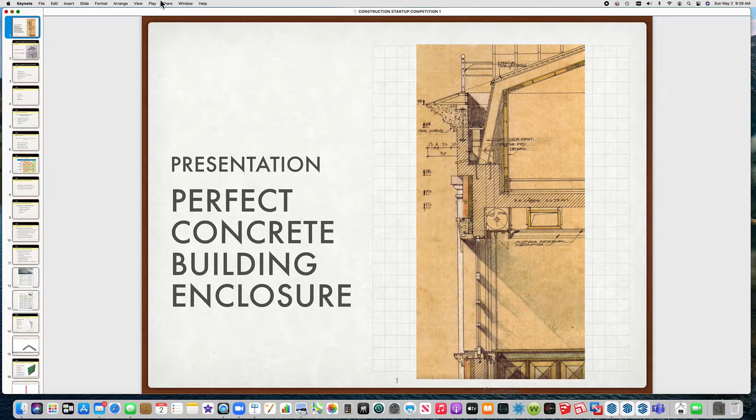I'm a registered structural engineer in the state of Ohio. I'm also an accredited professional with LEED, Building Design and Construction, and I have 45 years of construction management, design, inspection, and forensics experience in Central Ohio.

The point of today's presentation is to give you an idea of what my invention is.

It incorporates the longevity of concrete in the wall system. It is of extremely high quality due to the nature that it is totally visible all at one point.

There is much less field labor involved. It's a very energy efficient wall. It delivers very high indoor air quality due to its components.

The framework is manufactured off-site with modular components, which allow it to take advantage of manufacturing technology in quality improvement. And the framework is internal and negates the need for expensive forming systems. Therefore, it is less costly.

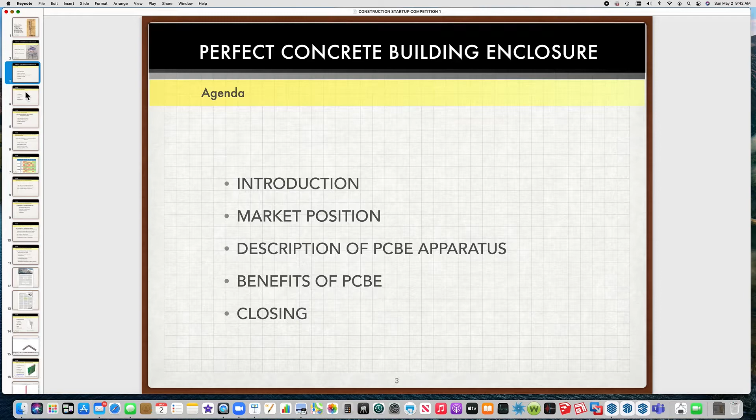The market position I envision are for universities, healthcare, hotels, and residential. And why is that? Well, these buildings require the following performance criteria: high indoor air quality, comfort to occupants, energy efficient, and longevity.

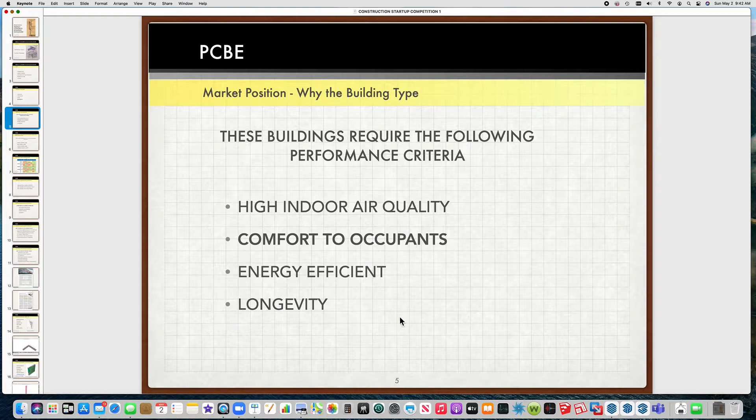The prioritized attributes of an effective building envelope: the highest priority is the water control layer. The second is the air control layer. Third, vapor control. And lastly, thermal control layer.

In other words, if your exterior building enclosure lets water in, it doesn't matter how good any of these other things are, it's going to be a complete failure.

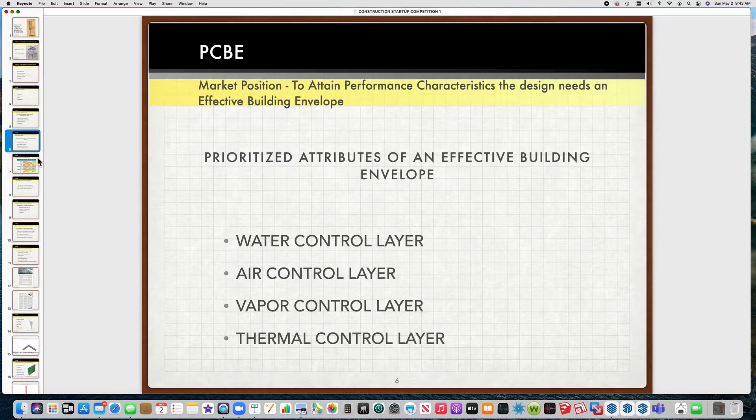So in taking these priorities, I've compared rationally the different building enclosure systems on the market.

So down along this column are the attributes, and the top row are the different current building enclosure types: cavity wall masonry, EIFS, metal panels, thin veneer, precast, cast in place sandwich wall, and the perfect concrete building enclosure.

Now, I rated these different systems. Like a cavity wall masonry is the barrier for water control uninterrupted, and it isn't when you build a masonry wall. So I gave that a negative, or red. And if it is neutral, I give it a yellow and a number score of 0.

And if it's good in that area, like a masonry cavity wall does dry to the inside, I give it a green or a 1.

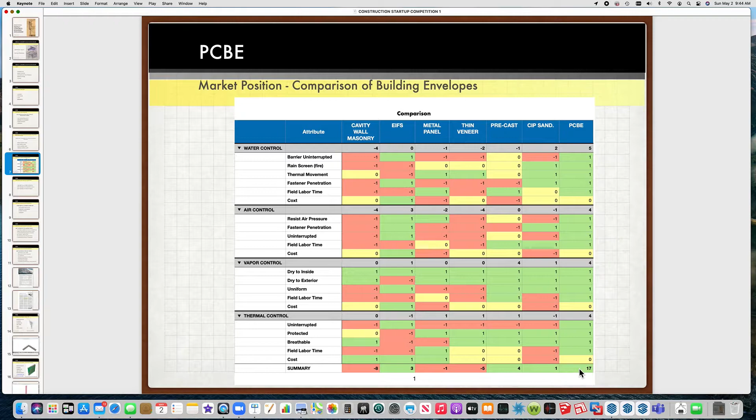So I rate all these systems and I sum up the numbers, and the two high ones are precast and cast in place sandwich wall construction, and my system, the perfect concrete building enclosure, just knocks it out of the park with a 17.

Basically, the perfect concrete building enclosure has the best of precast systems and cast in place sandwich wall systems. It meets all their desired attributes, and those attributes, which would be high indoor air quality, comfort to occupants, energy efficient, and longevity.

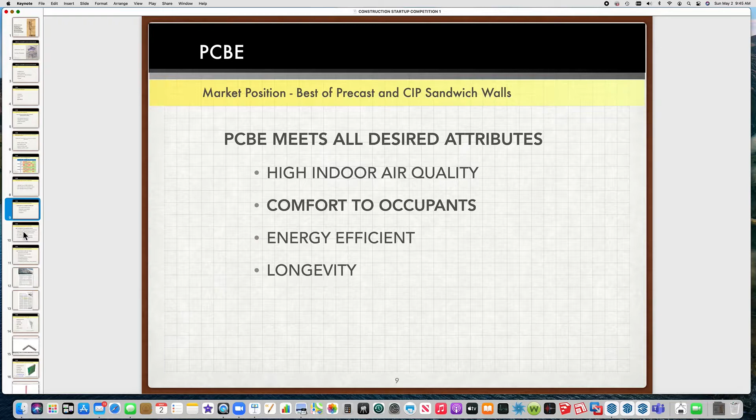The best features of cast in place sandwich walls: the thermal barrier is encased in concrete and protects the structural wythe of the wall. The vapor barrier is encased in concrete. No fitment issues in the field since it's cast in place.

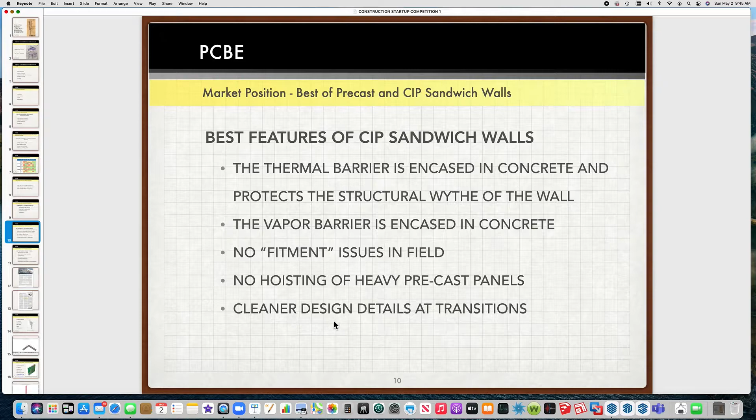No hoisting of heavy precast panels. And it's a cleaner design details at various transitions throughout the wall.

So how about precast panels? Well, it also has the best attributes of precast: reduction in field labor, reduction in project duration, quality control is greatly simplified, precise reinforcement, can also use composite reinforcement, continuous insulation,

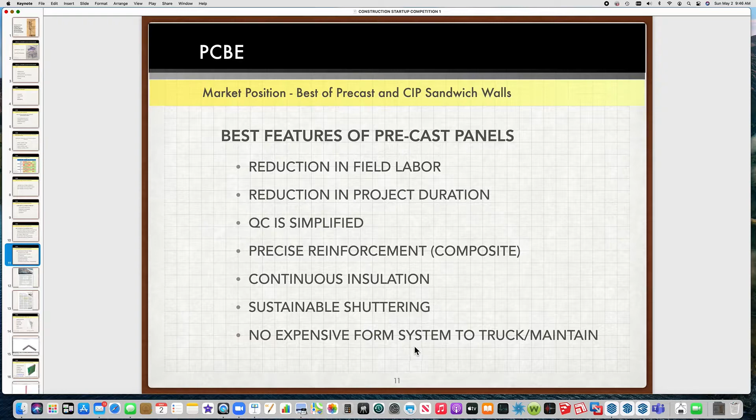sustainable shuttering, and no expensive form system to truck and maintain.

And building enclosure is a modular system. The framework is made up of several standard components that are made in a factory and assembled in a factory per a set of shop drawings that are approved by the contractor and the architect.

Modular fabrication is ultimately a manufacturing process that the construction crews can finally tap into to increase productivity and quality and reduce the amount of field skilled labor that is required. So quality, price, and time are all improved by using modular.

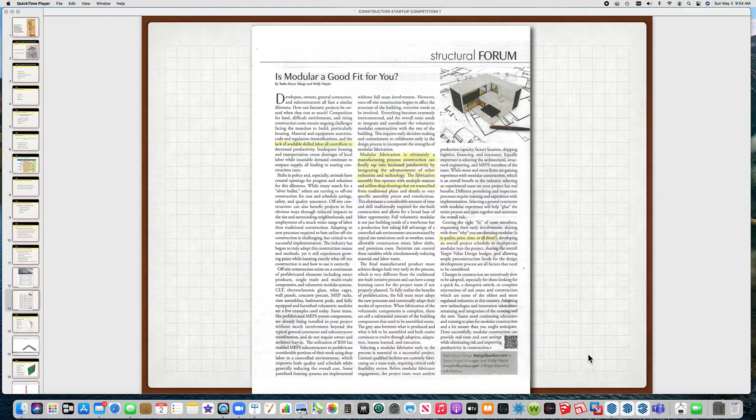So here we are, starting with a footer. It's time to show you the apparatus in use. I first would like to start with the end in mind, a sample project of two straight walls at a particular length each and an outside corner, just for simplicity.

These walls are going to be setting on the form footer that you see that has vertical rebar dowels sticking up. Now this very well could be the 3rd or 4th floor of a building that we start with, but for simplicity's sake, we're going to have two straight walls, particular length and height, and an outside corner.

Now, the shop drawings have all been approved. The panels have been manufactured and shipped to the job site. Now it's time to start building this little project.

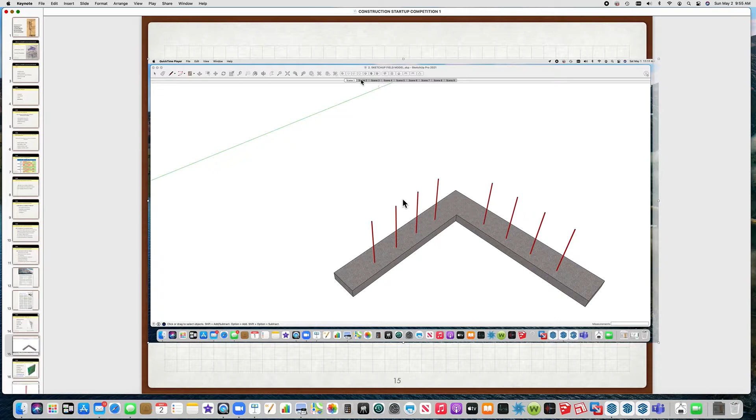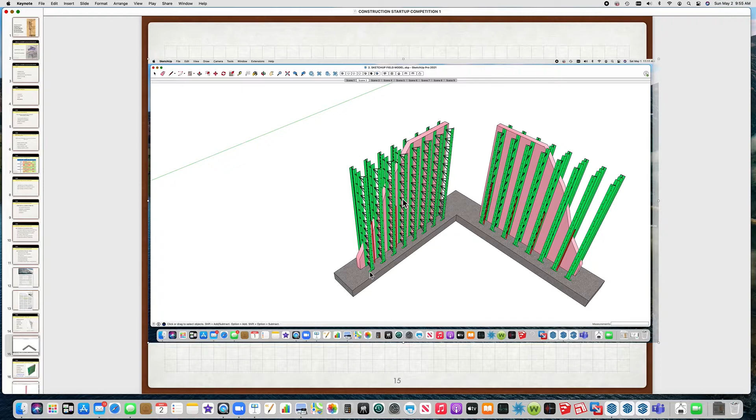So first thing the crews will do is set the two panels, the straight wall panels, that are a project-specific height and length, and they set them in an exact location on the footer, and they get bolted down through these little feet to the footer.

The next step is to insert the corner module. In this case, it's an outside corner, and there's two friction fit H members that get attached to the rigid insulation panels, or rigid insulation partitions of the panels. And that's how we get a seal from one panel to the other.

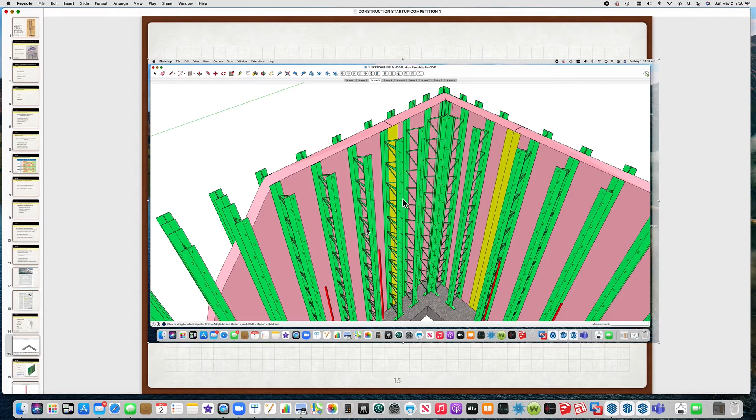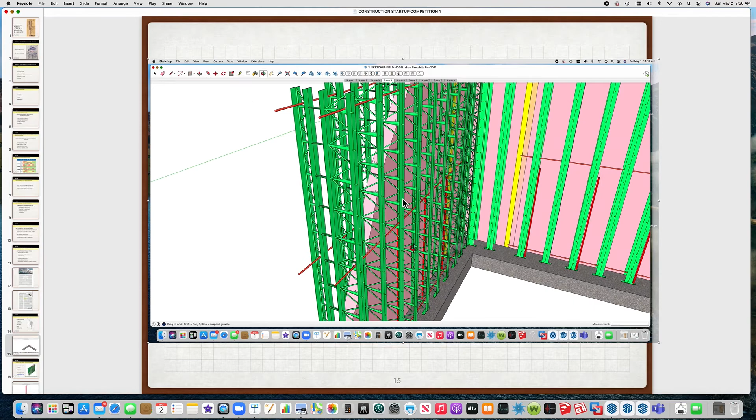Okay, the next step for the field is to insert the horizontal bars as called out on the engineer of record's drawings, both in the exterior partition and interior partition. You can see that better here. And remember, we have these rebar locators that locate the bars, the exact location from the outside face of the concrete.

Now, the next step for the field crews is to install the shuttering. Well, one more step before that. Let's go back a minute, because this is one of the important things. Now, all the bars are installed, the horizontal, the vertical. If there is any electrical or mechanical embedded items, everything is done, ready to go.

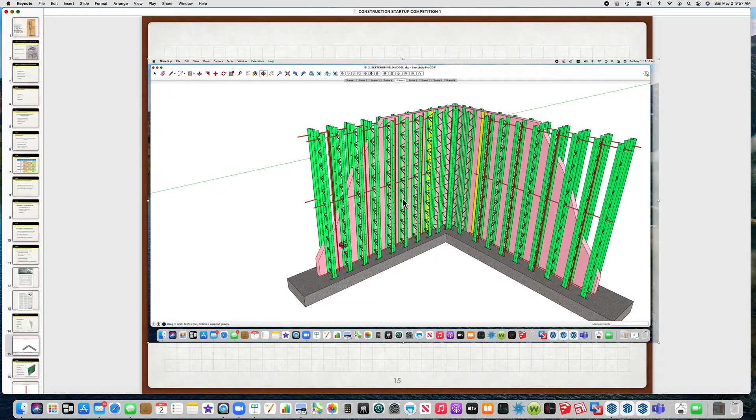At this point, an inspector or a quality control officer from the contractor's crew can visually inspect every component, the seals, the fitment, the rebar spacing, everything, where the electrical goes inside and outside for this wall prior to concrete pouring. This is one of the beauties of this system. Quality control is made very, very simple.

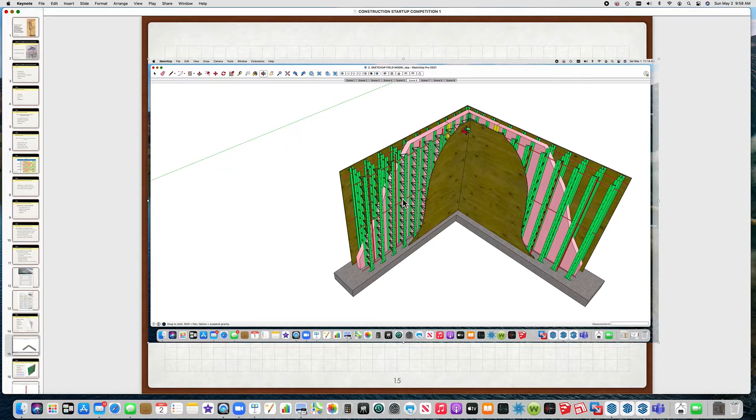So now, once the quality control officer or inspector has visually inspected everything, the shuttering can be installed. In this case, it's plywood, 3/4 inch plywood, and it gets fastened to these struts in these vertical flanges. These flanges are 3 inches wide, and as you can see, there's standoffs to keep the shuttering 3/4 of an inch off this face, so that concrete completely encapsulates the trusses.

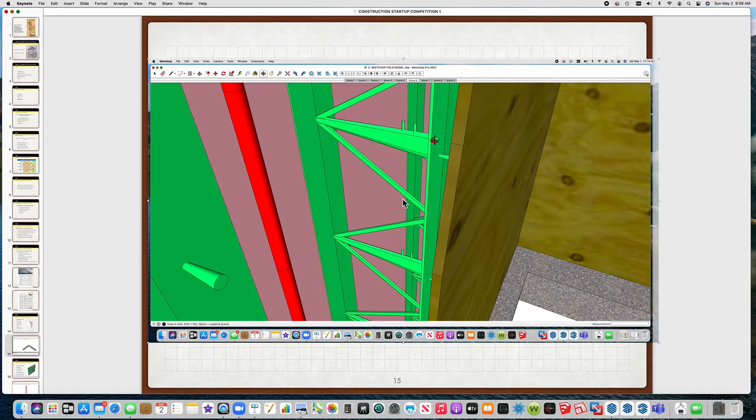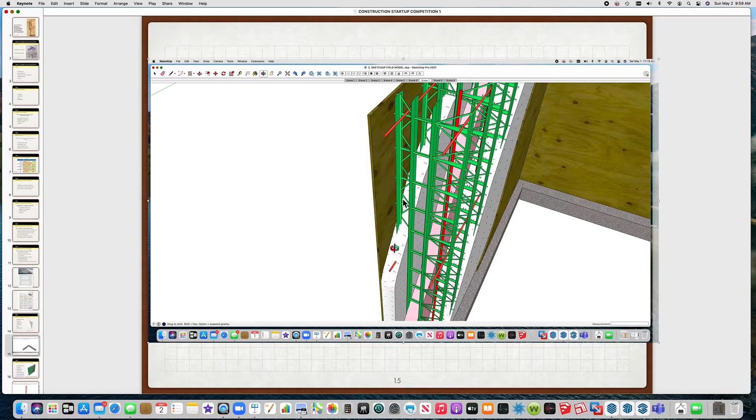So the next step in the process is to pour the concrete. Concrete is poured, and this is a cutaway, of course, but you can see there's two separate individual partitions of concrete. In this case, the project documents called for a 4-inch width of concrete on the exterior and an 8-inch on the interior.

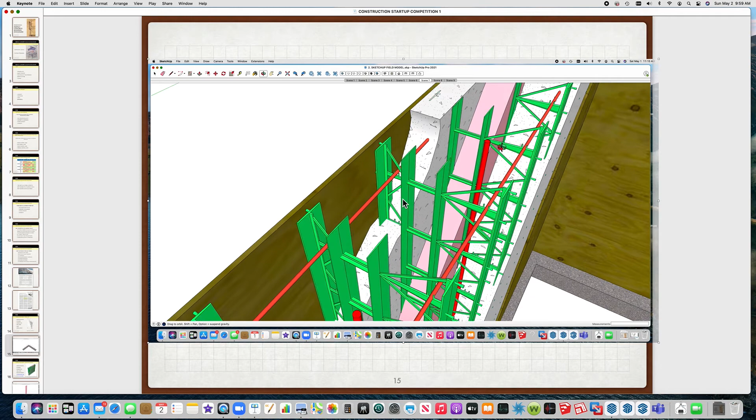These are connected through these shear connectors. These shear connectors go all the way through, and you can see how it works right here. But they're completely embedded, and they're tapered to withstand the tensile loads and to make these two partitions act together as one concrete wall with less concrete.

Shuttering is removed, and you can see you have a nice clean concrete face on both the interior and exterior. And the other nice thing about this is that you can visually inspect how well the consolidation job the crews have done, so there's never any worry that it stays completely covered. And also on the exterior. So that is it.

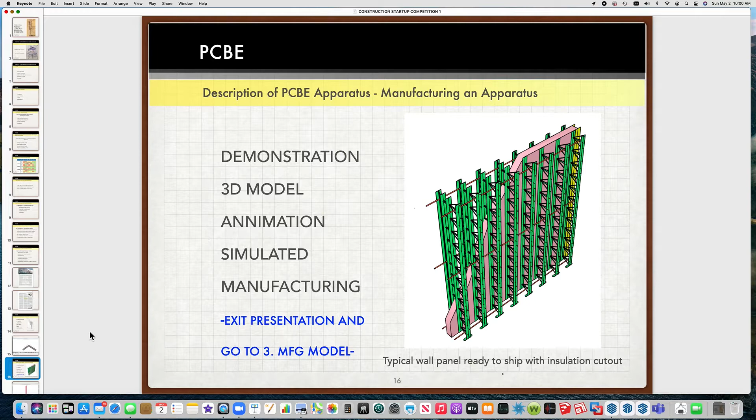And now we'll do a demonstration of the model being fabricated. This 3D model that I showed you was after all the manufacturing was done and the panels were shipped to the job site, how they are used. Now I'm going to show you how the panels get assembled in the factory.

Now to make a straight panel, there's three components. There's the rigid insulation partition. There is the vertical truss member, which is the heart of the system.

To connect the panels together out in the field, there is a plastic H-shaped connector device, this yellow thing right here. So let's see how one of these panels gets assembled.

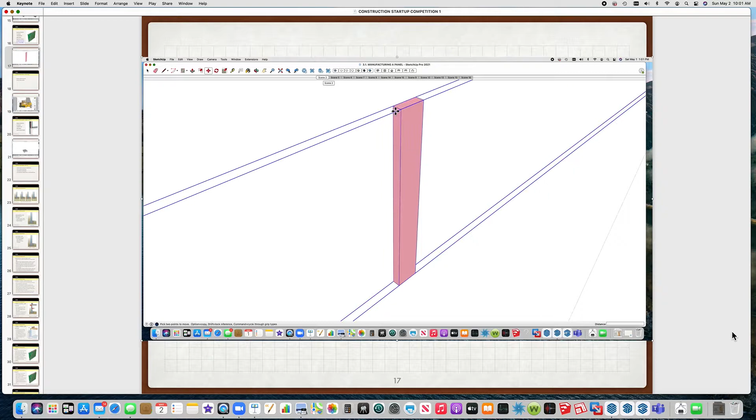First, it starts per project by cutting the piece to the correct height, and the spacing for this particular panel is 12 inches. So this panel is 12 inches in this direction, and the height is called out on the approved shop drawings, which I'm going to show you an example of later in the presentation.

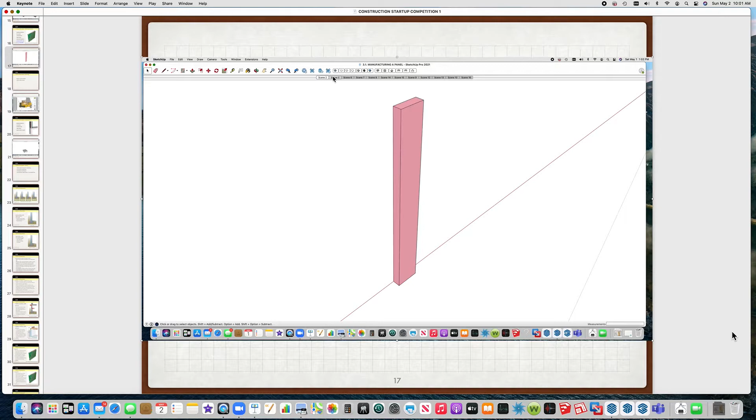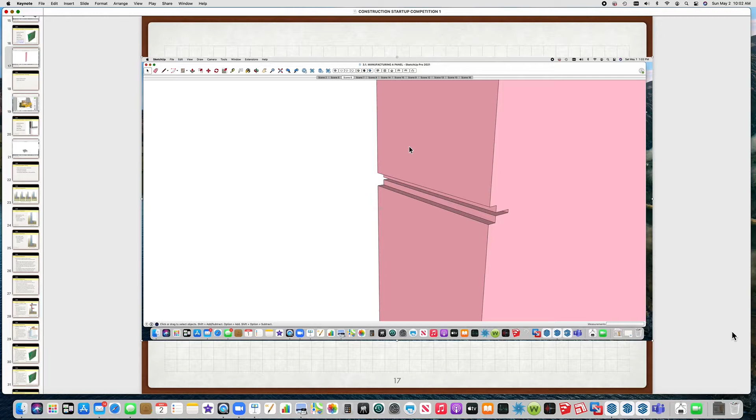The next step is to take this rigid insulation partition and cut grooves into it. These grooves are precisely cut, and through manufacturing a system can be developed, either a hot wire or a laser or some other method, whatever would be most economical and quick to do. It's also done on both sides, as you can see.

So the next step is to cut the pre-made vertical trusses to height, so that this height matches the approved shop drawing.

As you will see, these trusses have shear connectors that go all the way through the rigid insulation, and provide two things: support of these flanges during the short duration liquid state of concrete, and the long-term shear connection capability to allow the two concrete partitions to act together in composite action.

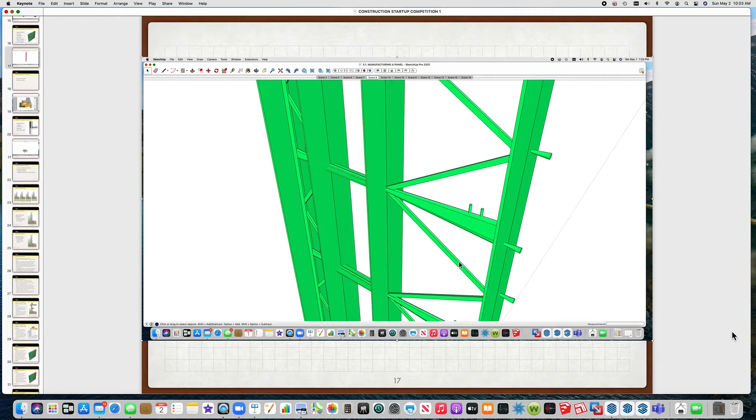Also, these trusses have feet on the bottom, which have holes for attaching to floors, or in the case we showed previously, a footer.

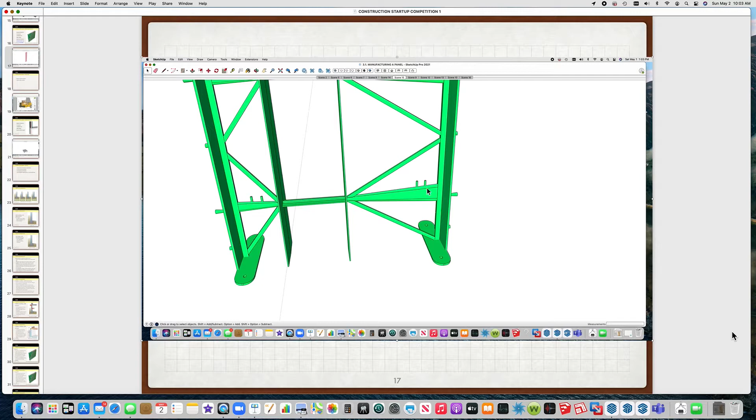As you can see, it is symmetrical around the center line, so it can be easily manufactured with an injection molding system.

The next step is to spray the rigid foam pieces that we grooved with an adhesive and attach it to the vertical truss. And as you can see, it's a real tight fit.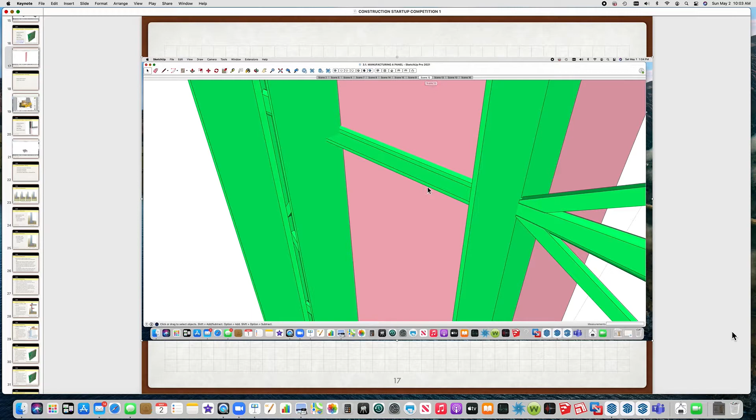The next step is to bring in another rigid insulation partition and spray adhesive the same way. And this process is completed until the length of this panel matches the length on the shop drawing.

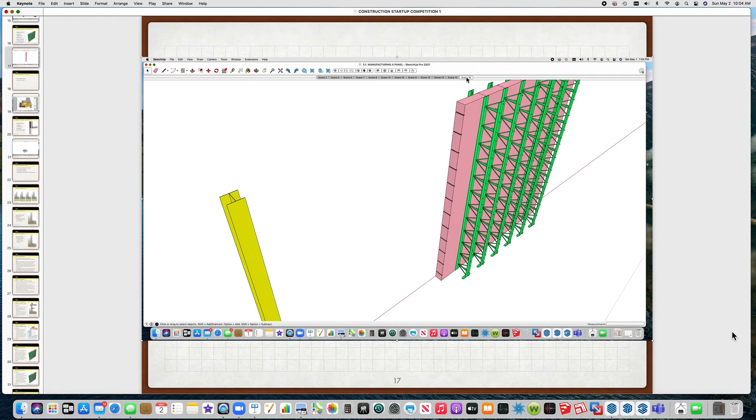Once it is done, the factory will mark on the top what mark number it is, so it matches the shop drawing. Now, connectors, these are slip-on connectors, will be attached in the field.

They are friction fit, and quite easily attached by just sliding them right onto the rigid insulation, as you can see, just like that. And then the next panel is slid right into it. So that's how that works.

And that is the system during manufacturing. The beauty of this is that the separate components, the 5 separate components, can be manufactured ahead of time and cut to the appropriate length for the assembly process, taking advantage of manufacturing technology to continuously improve the quality, the fit, the cost, and the duration, and also look at other materials in the future.

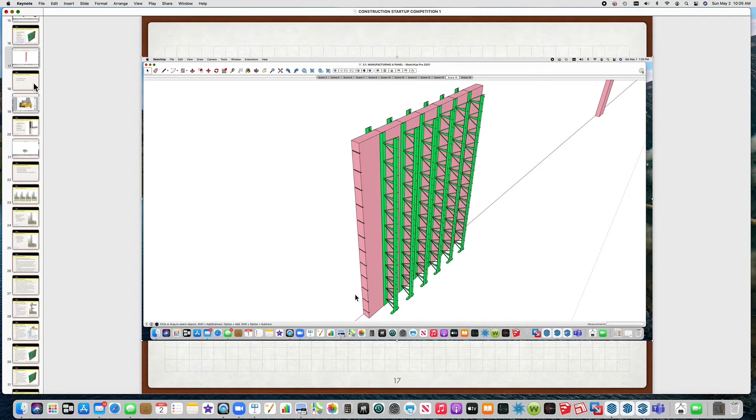Okay, the next step is to show you the shop drawing phase.

The last two 3D CAD models were representations of how the field assembles the panels and how the manufacturing plant would assemble the various components to make the panels. Well, what happens before that? Well, there's a typical shop drawing process.

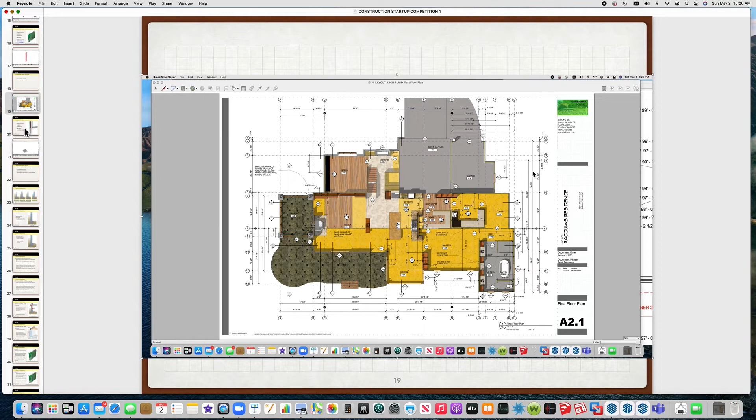What you see here is an architectural drawing that gets submitted to the client, and there's also a foundation plan, which looks like this. The foundation plan has all the lengths, dimensions, top of wall marks, and any penetrations that are listed.

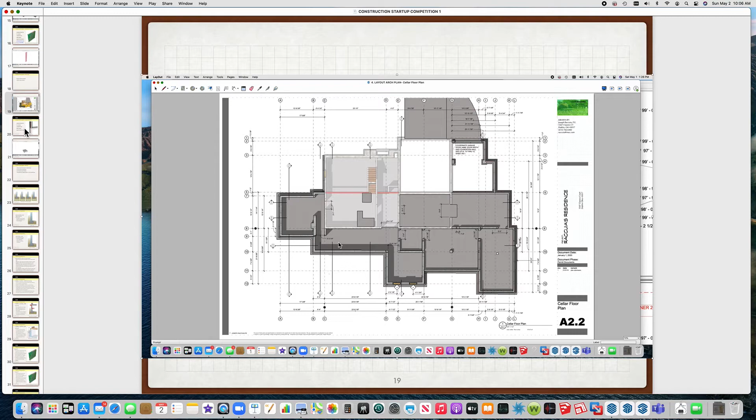We're going to look at this wall right here and show you what a shop drawing layout plan with all the different pieces would look like. So here's that wall right here.

It's made up of one outside corner and one inside corner, both 2 foot by 2 foot, which is our standard module for corners. The wall panel is exactly 24 foot, 3/4 inch long, and the top of wall is 8 foot and 1/8 of an inch high.

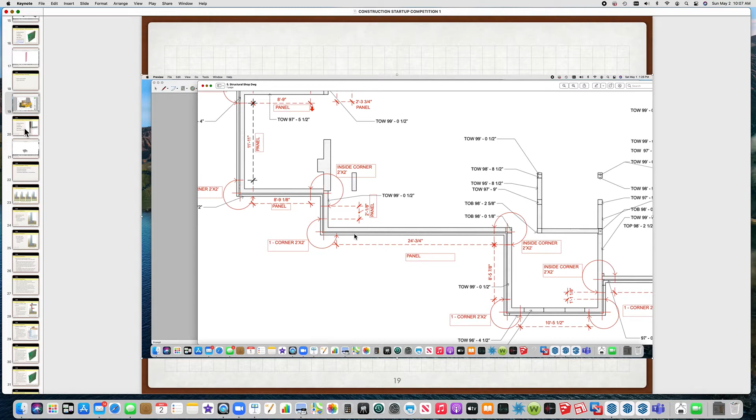So this would be submitted to the contractors and to the architect for approval. Once approved, then the panels can go into manufacturing. And it's the same way for all the panels on the exterior walls.

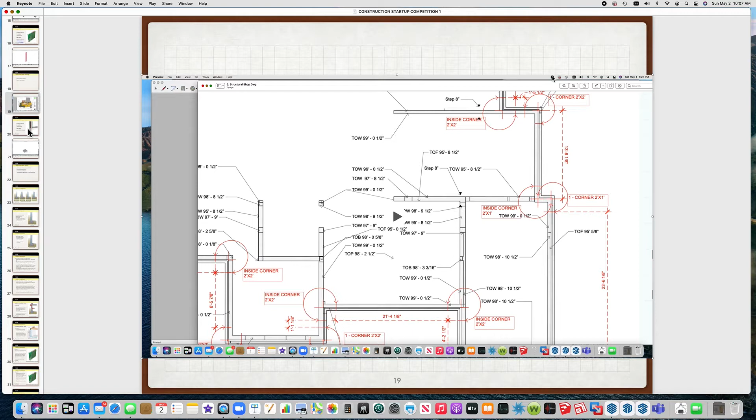Okay, the next video is going to detail how we do multi-story construction.

This system is also quite easily adapted to multi-story construction, and I'm going to run through an example very quickly on that. Starting with the footer, the first step is, as we saw before, installing the wall panels, and the other steps I'm not going to show you.

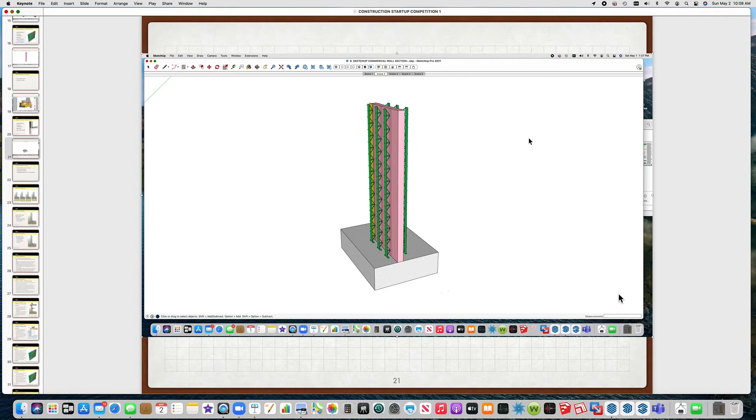Rebar, embeds, putting on the shuttering, pouring the walls, and then taking the shuttering off. So the result is a concrete wall on the lower floor.

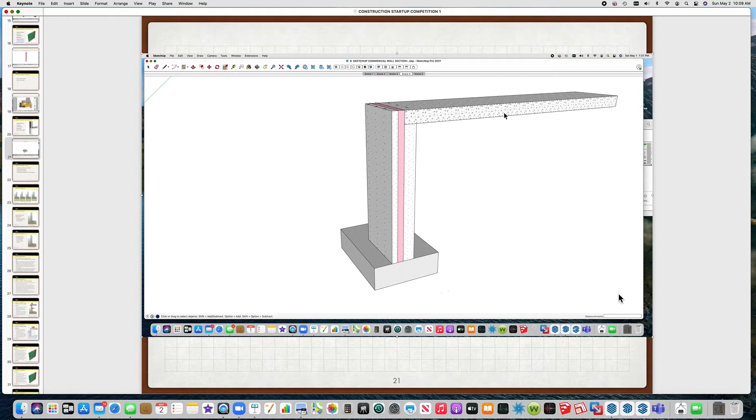The next step would be to either pour a concrete floor, or a steel with metal deck floor, or a precast concrete floor. And then, as you can see, the process starts all over again. And that's how multi-story construction can be done.

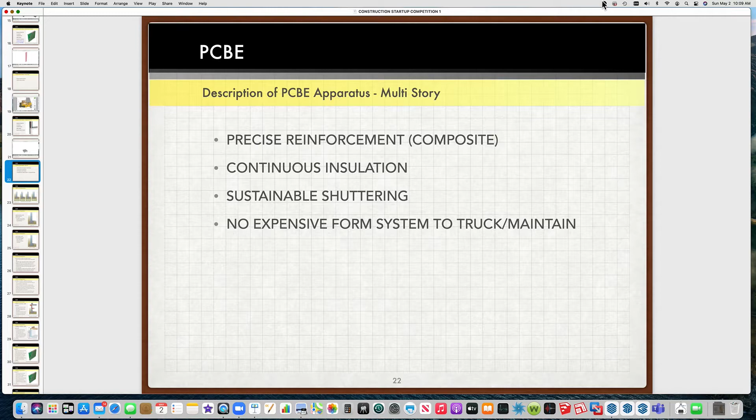The perfect concrete wall system, from shop drawings through manufacturing through field installation.

I'm going to spend more time describing the system in detail. I mentioned before that there are rebar locators that allow for precise reinforcement location. In addition, I see in the future that composite reinforcing steel could be utilized in this system quite easily and installed in the factory due to its lightweight, then shipped to the job site already installed.

Continuous insulation—I can't stress this enough—that continuous insulation partition in the center of the wall serves three purposes: it's an air barrier, a vapor barrier, and a thermal barrier. The material I talked about earlier was expanded polystyrene, which has an R value of about 5. There are other materials—phenolic rigid board has an R value of 8. The beauty of the manufacturing technology system is that materials can be analyzed and determined in the future as to which way they're going to go, if they go with different materials. So manufacturing, unlike construction, does have R&D to improve the product.

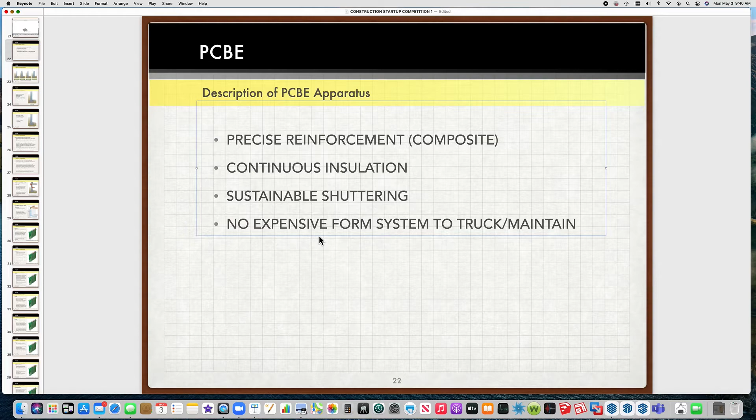Having the insulation partition in the center of the wall results in the perfect concrete wall system. I'm going to go through a few of the reasons why. With a wall system where the insulation is on the inside, whether above grade or below grade, when outside temperatures are colder than inside temperatures, if there are any leaks or cracks at all in this internal wall, the warm vapor transmits through and hits the cold surface of the concrete, condenses, and causes other problems: leakage, mold, decay, rot, bad odors.

On the next system, where the insulation is on the external face of the wall, whether above grade or below grade, the layer of insulation needs to be protected during the construction process and also during the life of the building. So there needs to be a protection membrane put out to protect it. Now, in most southern states, this practice is frowned upon due to termites—termites love to get into insulation and call it home, using it as a way to get up to the roof of the building and eat up the roof system. So that's a downside for that system. Putting insulation on both the inside and outside is even worse, because all the problems with having it on the external side and internal side are still present.

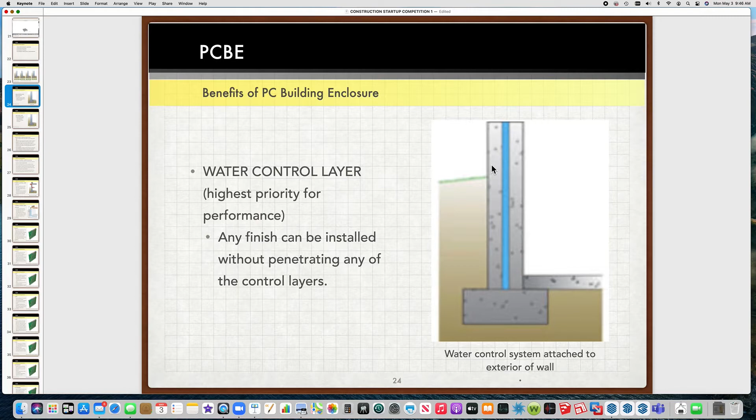I mentioned that the water control layer of a wall is the highest priority for performance. Having a solid concrete partition on the exterior of the wall means any finish can be installed without penetrating any of the control layers. The next highest priority is the air control layer, and it is continuous and verifiable. It is this continuous insulation partition in the center of the wall that is connected with H-shaped friction-fit connectors at all the joints. I say it's verifiable because before any of the walls are installed, before any shuttering is in place, it can be verified by a third-party inspector to confirm that it is continuous.

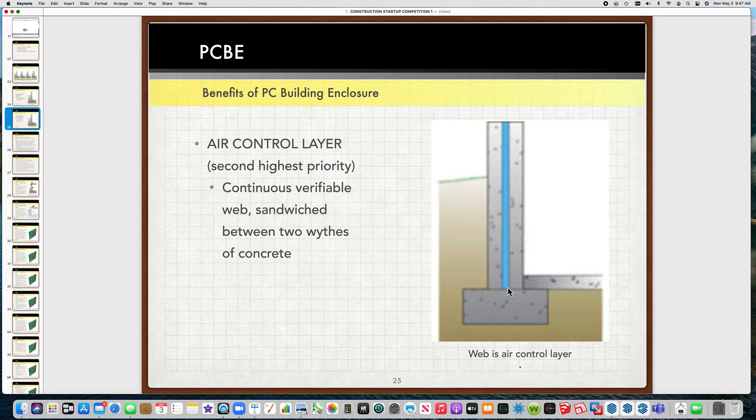The third highest priority is the vapor control layer. Again, it's that insulation partition which allows drying to the inside and drying to the outside from the center of the wall. Differential vapor pressure from a typical building, from inside to outside, is usually a factor of 2 times. The entire cross-section of the perfect concrete wall system is a vapor control system, with the benefit of concrete on both sides of the vapor barrier web. The concrete retards the flow of vapor by 3.2 perms per square foot per inch of concrete. There's no condensation on the interior face of the wall due to high vapor control performance—therefore no mold, no odor, no decay, and no corrosion, resulting in a comfortable indoor environment.

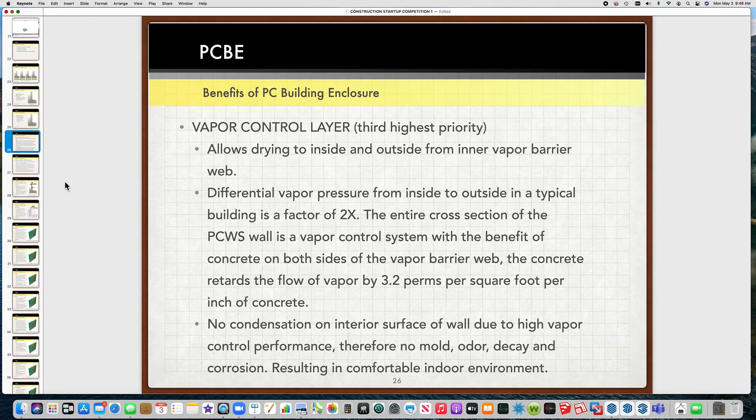The thermal control layer, the fourth and last priority. Insulation is not exposed for long periods of time during construction, so there's no physical damage or sunlight exposure. Insulation is not exposed after construction to physical damage because it's protected with 2 layers of concrete.

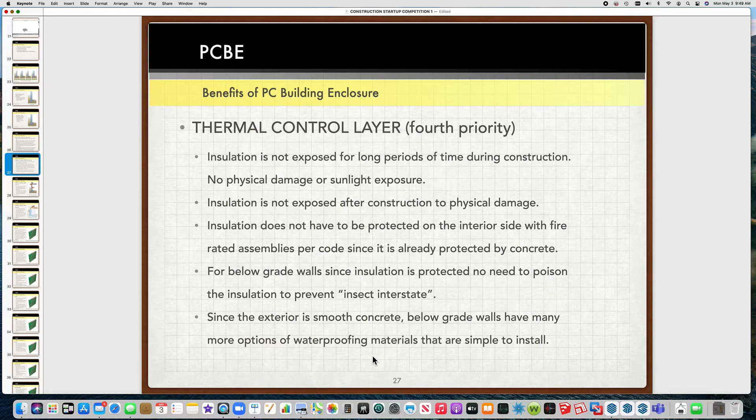For systems where you have below-grade walls, since the insulation is protected, there's no need to poison the insulation to prevent the so-called insect interstate. Since the exterior is smooth concrete, below-grade walls have many more options for waterproofing materials that are simple to install.

A typical 4 inches of extruded polystyrene at an R value of 5 will produce an R20, but the thermal mass of the concrete on the inside and the outside greatly increases it, with an effective R value of R42. Basically, the thermal mass slows down the heat transfer through the wall. It's very durable for the long term because the insulation, air barrier, and vapor control barriers are sealed in concrete and protected.

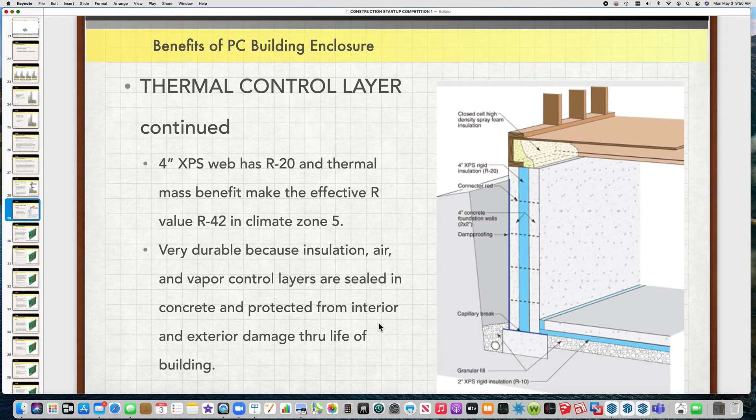Quality. Since these panels are manufactured, the web insulation, the shear connectors, the composite horizontal rebar are precisely placed and eliminate any field errors. Panel connectors ensure air tightness, these yellow H-shaped friction fit connectors. Since all panels as well as all vertical reinforcing are placed before the shuttering goes up, the entire system can be visually and third-party inspected all at once.

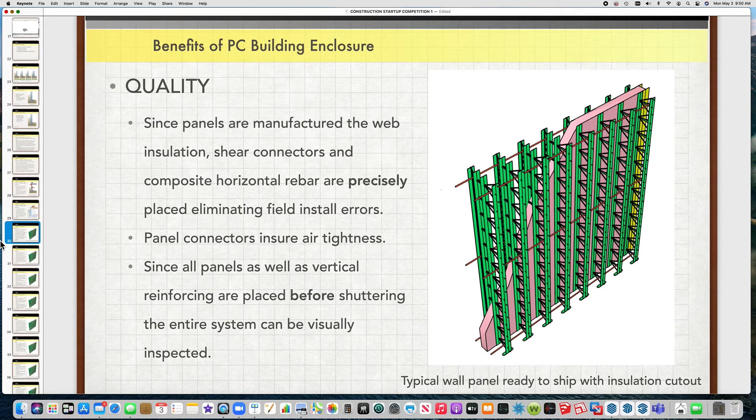Accurately placed reinforcement steel prevents cracking, and continuous impervious web results in double protection against air leaks and water leaks. After shuttering is removed, visual inspection of the interior and exterior surfaces of the wall is performed to ensure a quality wall.

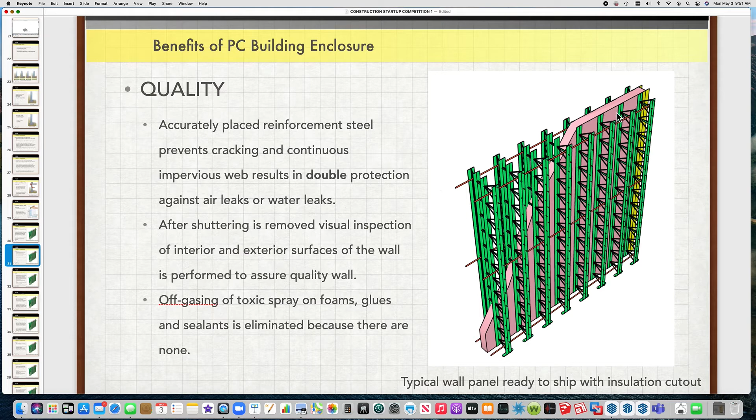Off-gassing of toxic spray foams, glues, sealants is eliminated because there are none. Now, the jury is still out on expanded polystyrene, how much off-gassing it has, but because in this system it's totally encased in concrete, there is no chance of that off-gassing to the inside of the wall, as there would be if this insulation was placed on the inside.

Engineering, submittal, and manufacturing is minimal since the product has a small number of standardized components. These struts, these web members, these connectors. Shipping costs are minor since panels are lightweight with composite horizontal rebar and no heavy concrete to ship around. No equipment required to unload and install.

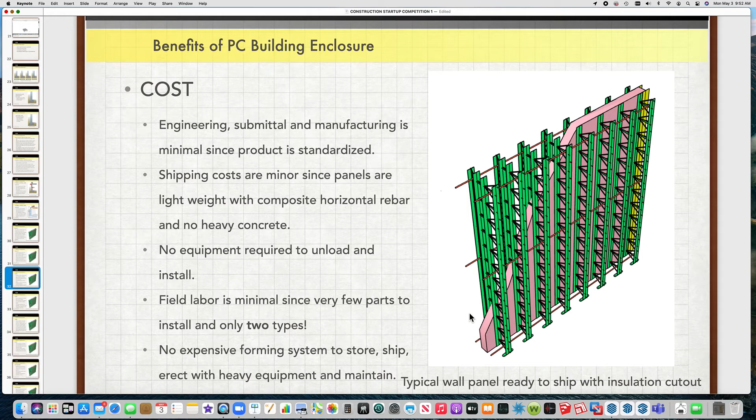Field labor is minimal since there are very few parts to install and only 2 types of panels, the straight wall panel and the corner panel, all with control marks along the top showing the field crews where they go. No expensive forming system to store, ship, erect with heavy equipment and maintain.

Plywood shuttering can be used for other parts of the building. Plywood shuttering can be installed by any carpenter. Similar to installing drywall, it's very easy. It gets installed with a self-tapping screw, number 8 screw with a button head top.

The composite struts and ties are designed for a 4 foot per hour pour rate, as well as full shear resistance when the wall is subjected to lateral loads. External wall system can be easily attached to the exterior concrete withe with no additional support steel. Since there is no exposed insulation on exterior or interior, no additional fire-rated materials need to be installed.

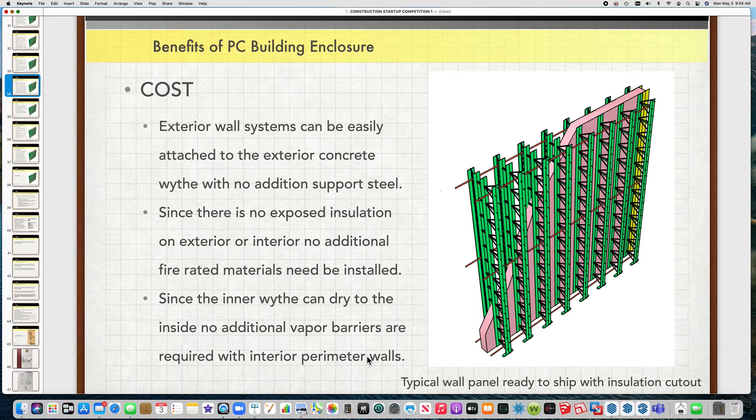Since the inner withe, that's the inner withe of concrete, the inside face, can dry to the inside, no additional vapor barriers are required with the expensive flashing and tapes and sealants and adhesives. Below grade spaces, if this system is used for below grade, can actually be used as comfortable living and workspaces, reducing the need to increase the building footprint above grade.

With the high cost of residential houses today, if you can use the basement as livable space, then that's a big benefit. The first cost of mechanical systems providing heating, cooling, humidity, air quality control are minimized, since this system solves all the problems of air leakage, vapor control, and thermal control in the exterior wall.

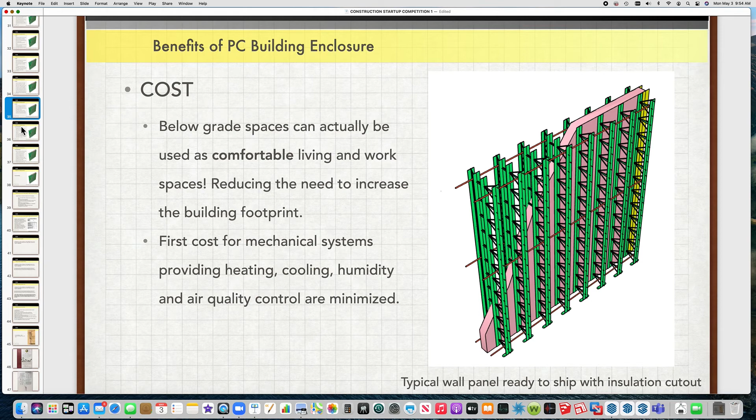Building envelope commissioning, which I think is going to be prevalent in the future in the United States, where the performance can now be predicted due to the ease of visual inspection all at once, right before they put the shuttering on. Minimal mechanical systems result in lower energy use. Since panels are manufactured to a project, there is little or no waste.

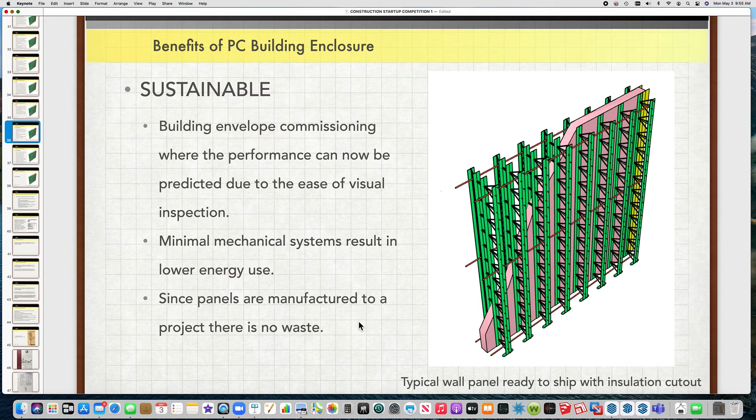Reuse of shuttering on the project reduces trucking, equipment for erection, metal forms, and material use, which boils down to less fuel being consumed. Therefore, a smaller carbon footprint. So this is very sustainable. The concrete is durable. In some buildings, it's 2,000 years old.

I know concrete is out for review right now as to whether or not it reduces the carbon footprint. Well, if you compare this to precast, the precast panels have to be trucked a long distance, which consumes a lot of fuel. Most concrete plants are very close to the job sites, so you reduce that trucking. Concrete itself, the cement, consumes a lot of energy in the production of cement.

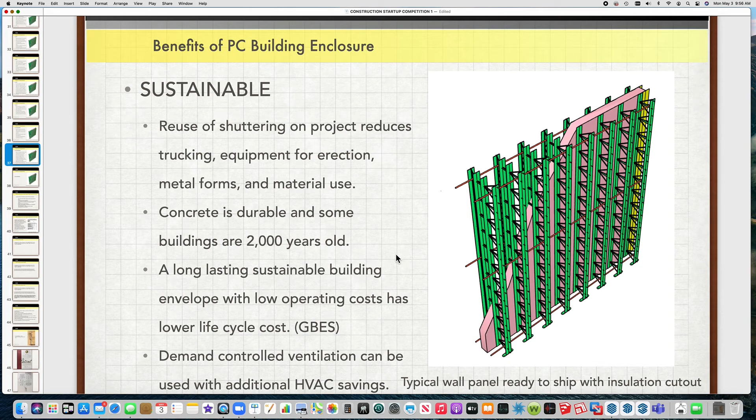However, there are technologies today that are being developed using crushed and ground up fly ash to capture some of the carbon to make the concrete closer to being carbon neutral. So keep that in mind, that concrete is becoming a better material to use for sustainable buildings.

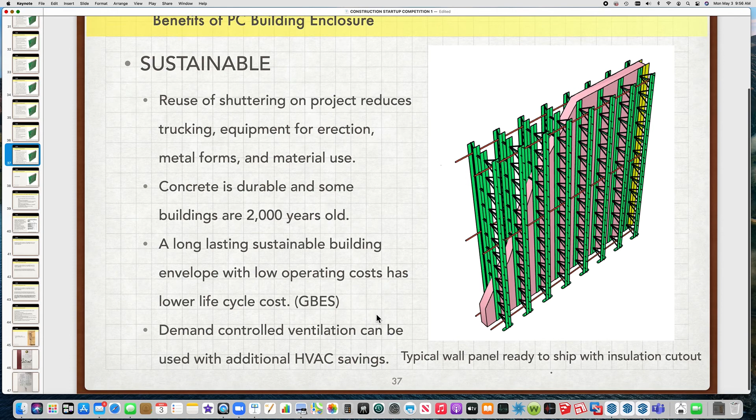It's a long-lasting envelope with low operating costs, and it has a much lower life cycle cost, according to the GBES. Demand-controlled ventilation can be used with additional HVAC savings, since the buildings are more airtight and vapor controlled. This system is engineered. I have engineered it, and I have all the calculations as backup if the right company wants to develop it with me.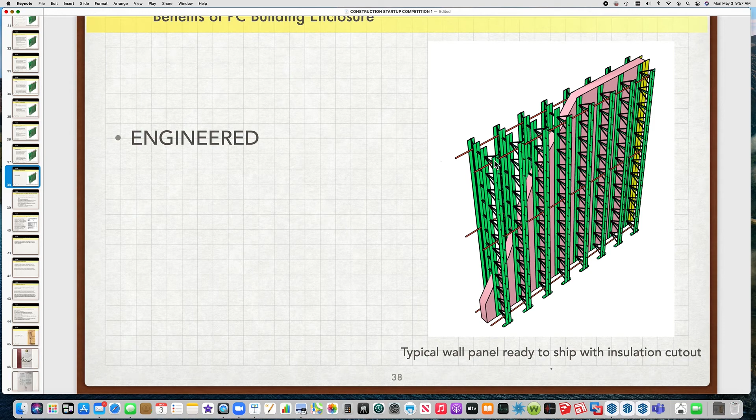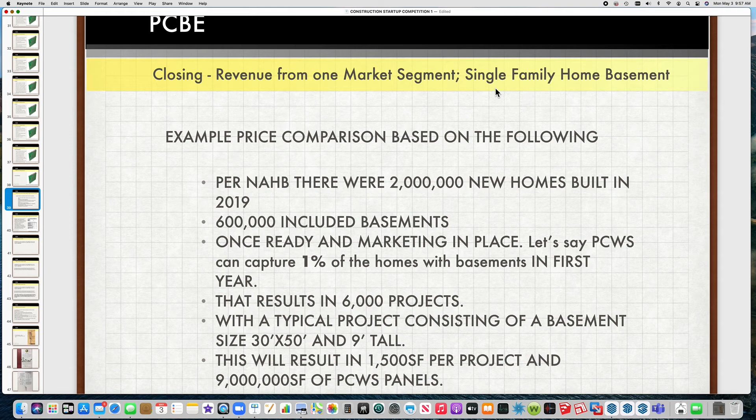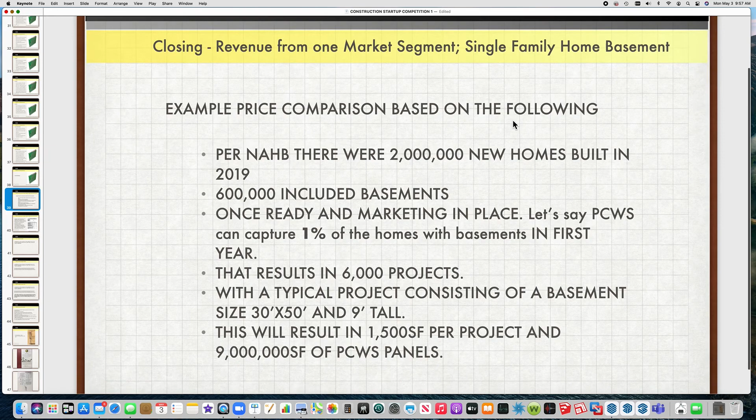Okay, now let's talk about price. The easiest access to information that I found in the 4 market segments was single-family homes. So I'm going to run through this example based on just the single-family homes, not the healthcare, university, or hotels. According to the National Association of Home Builders, there were 2 million new homes built in 2019. 600,000 of those included basements.

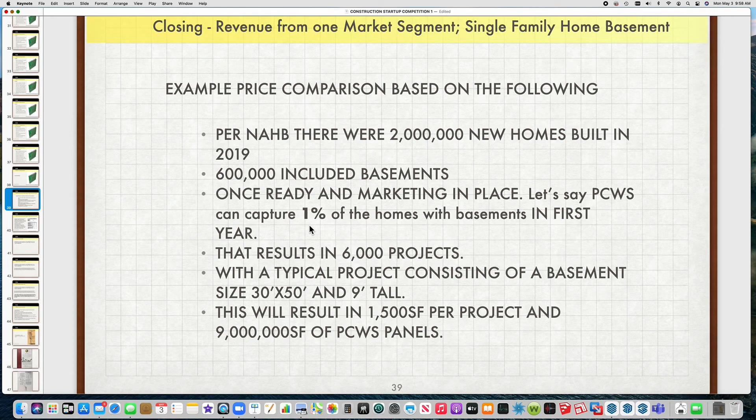And let's say we start out marketing the system for basements, and we capture 1% of those homes in the first year. That results in 6,000 projects, with a typical basement being 30 by 50, 9 foot tall. That yields 1,500 square feet of panels per project and 9 million square feet total panels. So using the 9 million square feet of panels, that would result in a market share of close to 85 million, only 1% of the market share. That is pretty incredible. So I think anyone who wants to manufacture has to market up or get ready for a huge influx of demand.

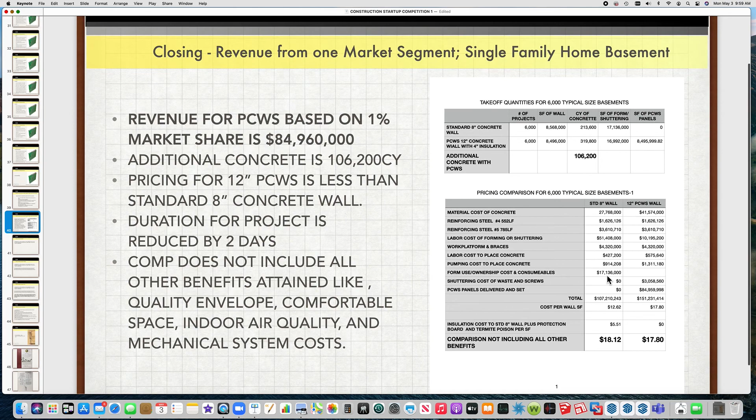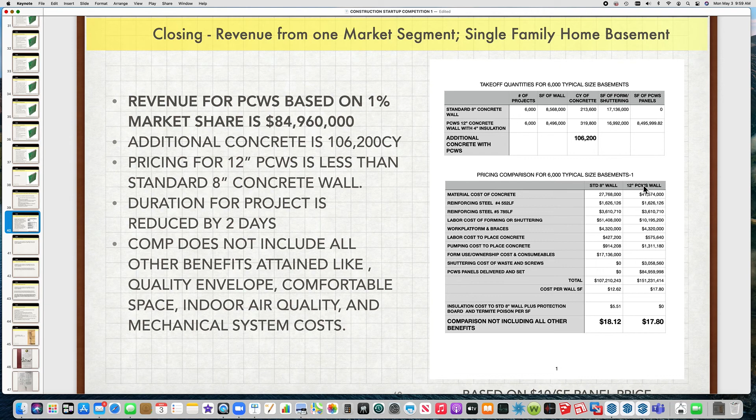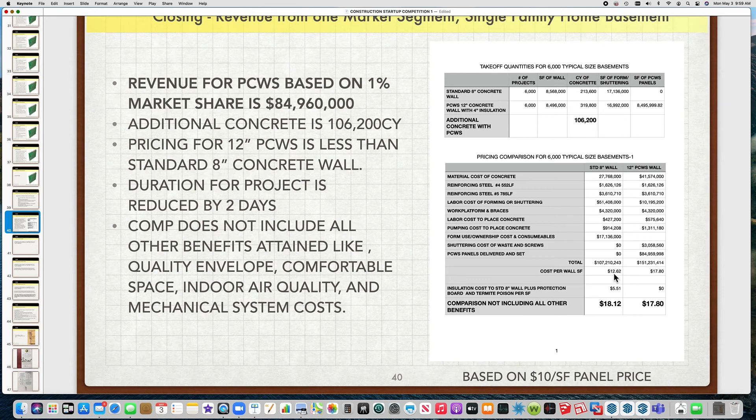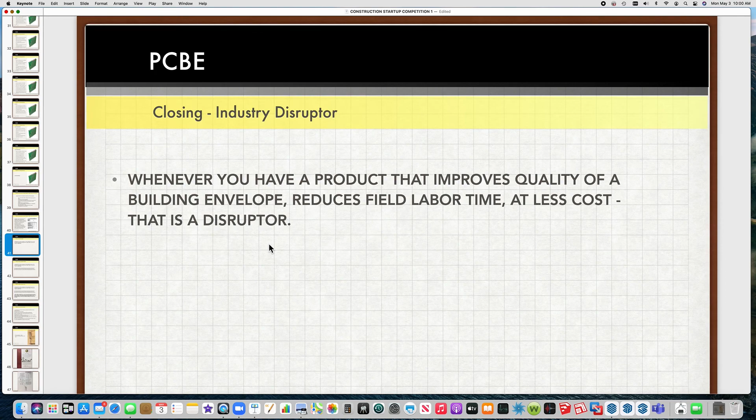I also did a cost comparison for a standard 8-inch wall with exterior insulation. So the 8-inch standard wall with exterior insulation versus the perfect concrete wall system. With the panel price of $10 per square foot, which I believe can be manufactured for much less than that, it shows that the panel system, or the perfect concrete wall system, is less expensive in today's dollars than the cast in place straight concrete wall with exterior insulation on it. So, whenever you have a product that improves quality of a building envelope, reduces field labor time at less cost, that is an industry disruptor.

So to give you a little background on another industry disruptor, back in 1952, Carroll Sanford founded the pre-engineered wood truss system, which today is on practically every wood building. What he did was basically he reduced the field labor time. He improved the quality because now it's an engineered system, and he did it at less cost. That's why everybody has that system now.

So, in 2021, Perfect Concrete Wall System developed a new concrete wall system, greatly increasing the use of concrete over other systems, and has marked the beginning of the concrete industry resurgence as the preferred building envelope system that is changing residential, commercial, and institution building all over the world. That's what my vision is.